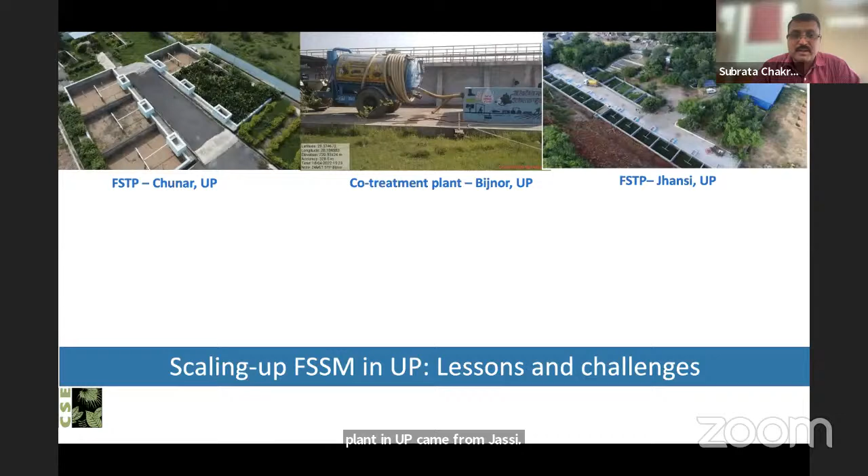Just to give a quick background of the India and Uttar Pradesh scenario: in Uttar Pradesh, 240 million people live in urban spaces, which is 22%, and there are 760 plus cities, and only 14% have piped sewer services. This means that 86% of people are dependent on on-site sanitation systems like septic tanks. So providing services to this 86% is an important and critical task to keep our rivers and water bodies clean.

This journey started before 2018, when CSE conducted shit flow diagram studies in more than 60 towns of UP, and made this an agenda at the state and national level. In 2018, the first FSTP in UP came in Jhansi, which is a 6 KLD nature-based FSTP.

Based on various other activities, in 2019 a tender for 61 more plants was floated. At that point, the target for UP was to have 62 plants - 22 co-treatment plants and 40 FSTPs. Now, as of March 2023, construction...

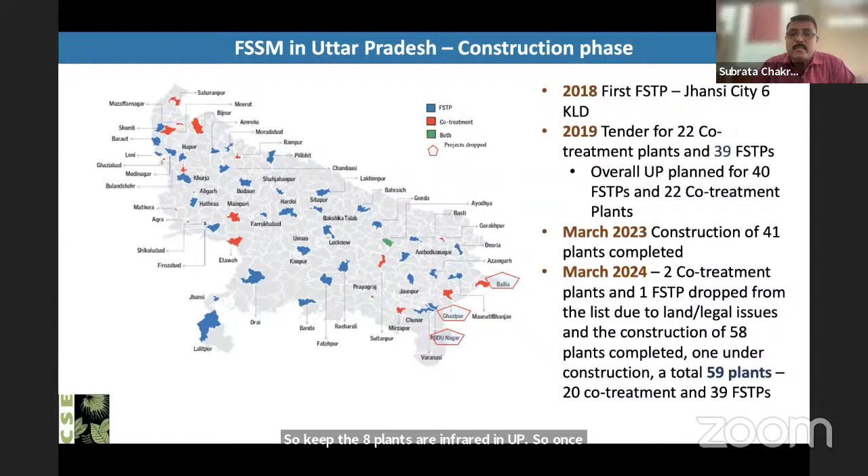So once plants are infra-ready, the next level of operational challenges comes in. During the construction phase we faced a couple of challenges in UP, and I want to quickly give you snapshots of some of them.

So clarity on operation and maintenance was not there. We spoke to the cities and various stakeholders and found that the plants were being constructed, but people involved in the entire process did not know at that point how these plants would run in the future. There was no clarity on that.

So reaching the plant site is an important issue. Having an all-weather approach road is important so that vehicles can move inside the plant. Approach road was an issue for 21 plants.

Lack of coordination among various departments and sub-department level officers was an issue, and change in implementation agencies was reported from 13 cities.

It means that in UP, Amrut was the major funder. Amrut funded UP Jal Nigam, the government agency in charge of creating infrastructure in various cities. UP Jal Nigam in turn contracted out various organizations and companies to create this infrastructure. The company that won the bid subcontracted their assignment to other organizations and companies. This created problems for smooth implementation and construction of the program, and it took time.

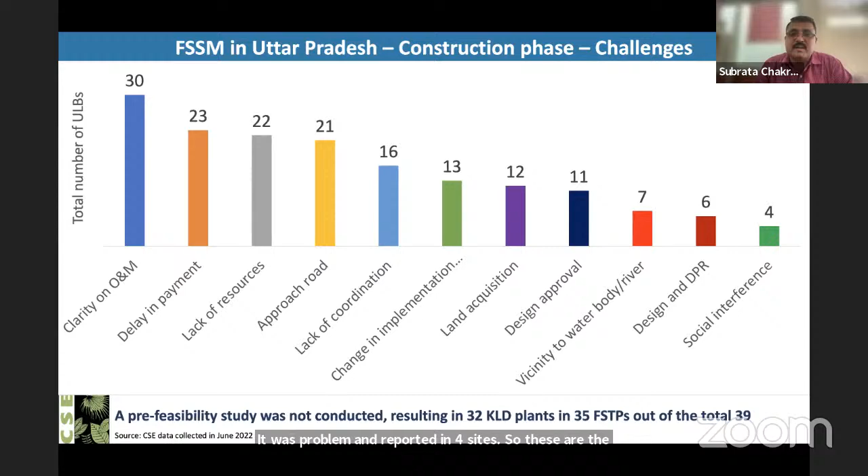So these are the problems the state witnessed during the construction phase. Now coming to the technology part, just touching on it quickly.

Out of these 59 plants, 39 are FSTPs. In UP, there is no state prescription for cities to have a certain chain of modules for FSTPs, so we see varied module chains. There are two major types of technology: nature-based technology and hybrid technologies.

Out of the 59 plants, 54 plants have been funded from Amrut with a costing of 198 crores, urban local bodies have funded 3 plants, and State Mission for Clean Ganga have funded 2 plants. So total 59 plants, and the capex cost is around 200 plus crore.

If we come to the size of the co-treatment plants, we see there are 20 KLD to 100 KLD plants, and maximum co-treatment plants are of 25 KLD. There are 11 co-treatment plants.

When it comes to the FSTPs, there are 4 plants which are of 6 KLD, 10 KLD, 12 KLD, 25 KLD, but the rest of the 35 plants are of 32 KLD size. This is because pre-feasibility studies were not conducted in many cities, many plants. So this is a kind of size that has been prescribed and taken up by the state, which may not fit the context.

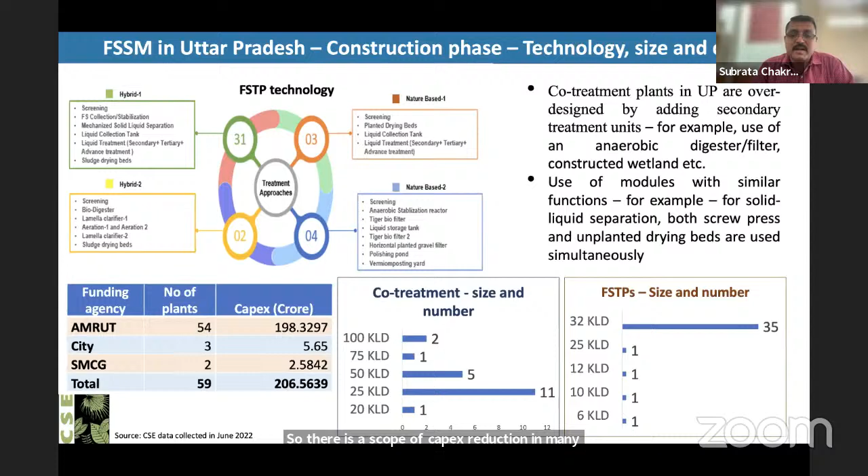With this, coming to April 2023, we see there are 40 plus plants ready for operationalization. So UP moved to the next level of problems—the nature of problems changed from construction-related problems to operational challenges. From April 2023, we have come across these problems.

Handover of the plant—we never imagined that could be a problem, because the construction was being done by UP Jal Nigam. Once construction is over, the construction agency UP Jal Nigam is supposed to hand over the plant to the owner, which is the urban local body. We thought this would be done in a smooth manner, but this did not happen so.

Once the handover is done, arrangement of the operation and maintenance mechanism at the plants needs to be done, and there is a problem there as well. Integrating private desludging operators was an important issue, and then having FSSM bylaws, capacity gap for operation and maintenance of the plants, community awareness, and low capacity utilization of the plants—these are some of the problems the state has faced, and the state has also taken certain actions that we'll be quickly sharing here.

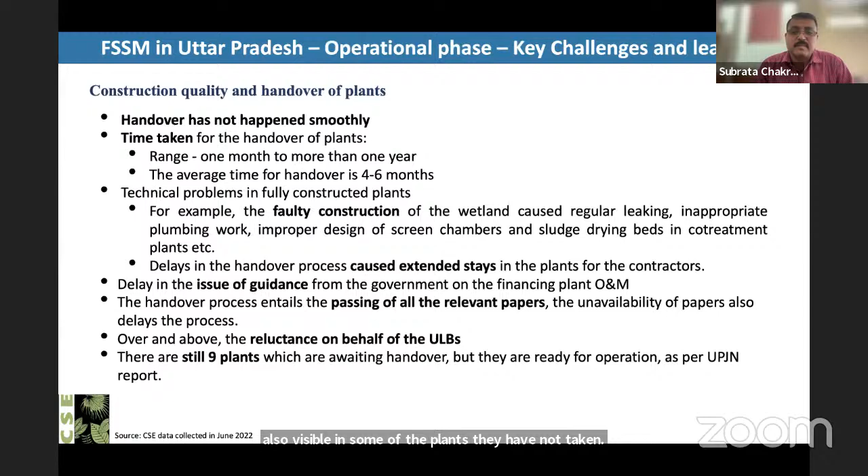Over and above that, reluctance on behalf of the ULBs is also visible in some of the plants they have not taken over, whether big cities or small cities, for some reason or other. There are 9 cities as of now which have not taken handover. So this is one of the technical problems.

If you see on the left-hand side panel, this is one fecal sludge treatment plant where the mechanism is supposed to pump out the sludge from the desludging vehicle directly. But you need to have a screen chamber and a screen before you pump out the sludge. So with our advocacy, with the Jal Nigam and others, if you see on the right-hand side, the location of the pump changed and a screen chamber was constructed.

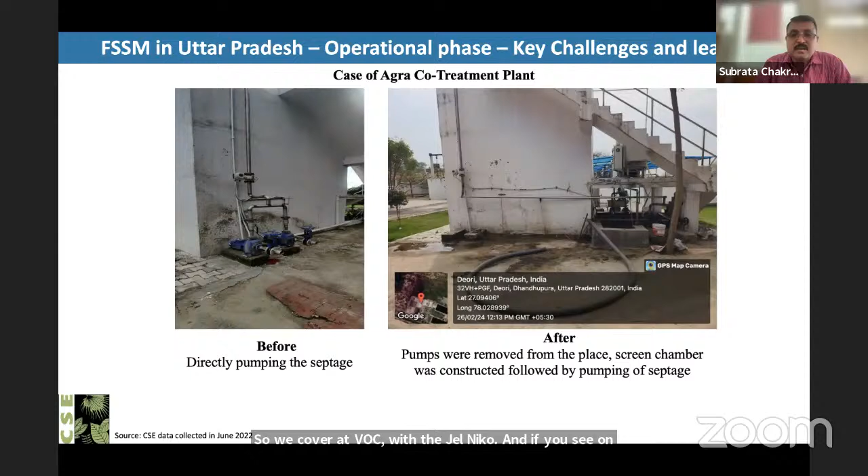Now, once the handover is done, the major important thing is the costing of the operation and maintenance of the plants. The initial contracts given by the UP Jal Nigam to the companies constructing the plant indicated that rupees 1.25 crore should be given for operationalizing the plants to the same company by the ULB. The ULB started thinking, how can I give 1.25 crore per year to a company to run a plant? They felt it was not possible for them.

Then CSE did a study in 2022 to understand the costing of FSTPs. Based on the findings, for a 32 KLD FSTP, we found three major types of technology in terms of costing: drying bed based natural system, Tiger biofilter based system, and hybrid system. We identified the cost components for operation and maintenance. The maximum cost comes to 22.32 lakhs per year, not month, and 16.8 lakh minimum cost for the natural based system, which is around 1.5 to 2 lakh per month.

This is the base cost; urban local bodies can add profit value to this when hiring any agency for O&M. Now for the co-treatment plant also, we have calculated the cost. For a 100 KLD co-treatment plant, the O&M cost comes to 20-plus lakh, and for a 25 KLD plant, it comes to 11 lakhs.

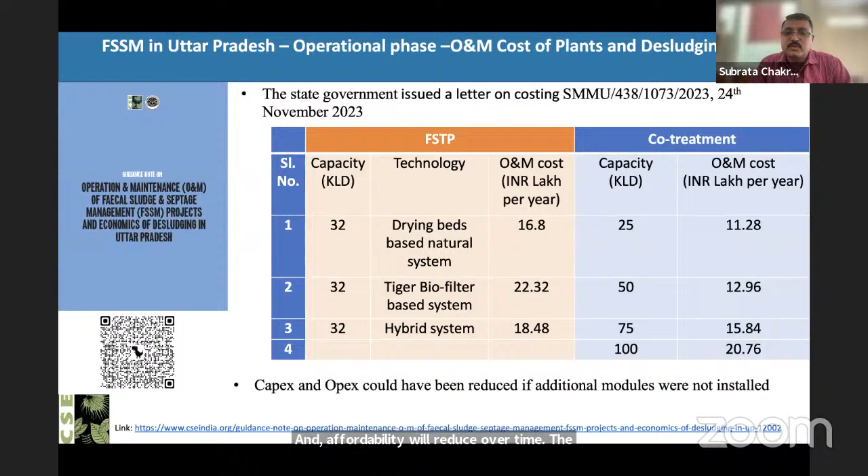Along with this order, the state has also issued a guidance note on fixing the desludging fee, because experience from various ULBs, medium and small size as well as big cities, shows that the desludging cost varies from rupees 500 to rupees 4,500. So CSE and the government started thinking about the logic and economics behind the desludging fee.

Based on that, we did a survey, and with the survey, we came up with a desludging cost calculator. In the desludging cost calculator, two important variables are the number of trips made by a vehicle per day and the distance to be traveled per trip. Based on these two criteria, the desludging cost is fixed. Once the cost is understood, we can understand the profit margin and the fee amount that can be derived.

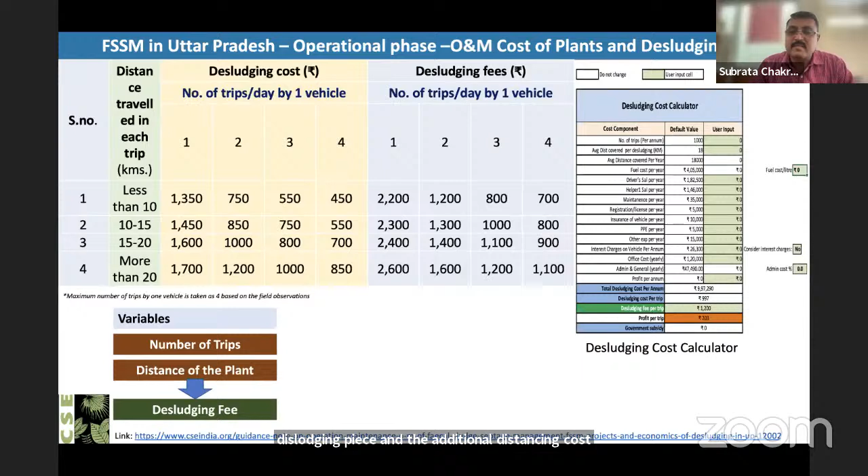So that his business will be viable as well, and the city people will keep getting desludging services. This is the reason the state government issued this guidance note on desludging cost and desludging fees. A desludging cost calculator was also given to the cities to help them arrive at context specific desludging fees.

Once all these guidelines were given, the cities started saying to us that this is a new type of contract, we need support on how to write it. Once the handover is taken, contracting was also taking another set of time - 1 month to more than 1 year is the time being taken by cities to arrange an entity for O&M of the plant.

For speedy engagement of contractors, CSE worked with the state government, and the state government issued a model contract document to the cities so that they can quickly contract.

Now the cities in UP are free to either engage a contractor, SHG women, or manage the plant through their own officials. So 3 types of things can happen in UP. It's a fully flexible model.

And the state has told the cities that either Central Finance Commission Fund, or ULB's own fund, or State Finance Commission Fund can be used for O&M of the plants.

Now, when cities gave contracts for O&M in the last 1 year, they have done it in 2 ways. In some contracts, they have only given O&M responsibility. In some plants, they have given O&M responsibility plus desludging services responsibility to the contractor.

Currently, 14 cities are managing plants themselves, 13 have contractors, and 4 cities have engaged SHGs.

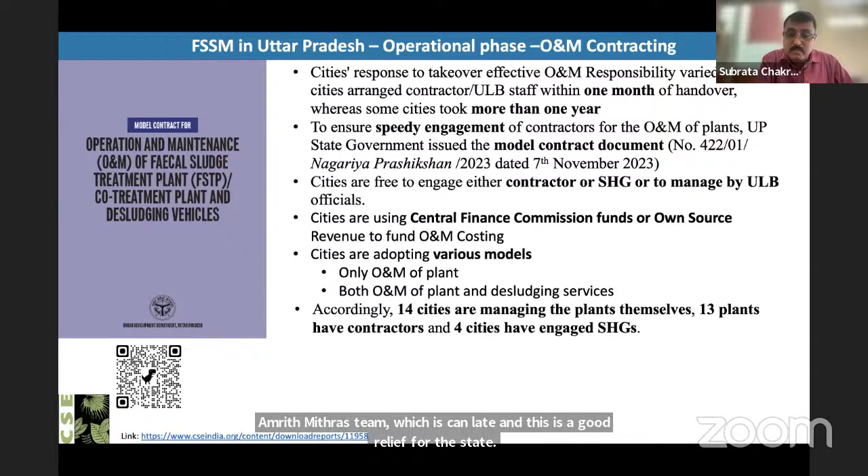Now SHGs are engaged under the Amrit Mitra scheme, which came late, and this is a good relief for the state because cities are now engaging women in the sanitation process in an important manner. We will be speaking about them in some future episodes.

Now coming to the softer part, with our experience from Chunar and Bijnor, we found that drafting of the bylaws, newspaper publication, and then taking this to the gazette notification process takes a longer time. But gazette notification of the FSSM bylaws is important because it has an important component on fees and fines. This gives the city a legal positioning.

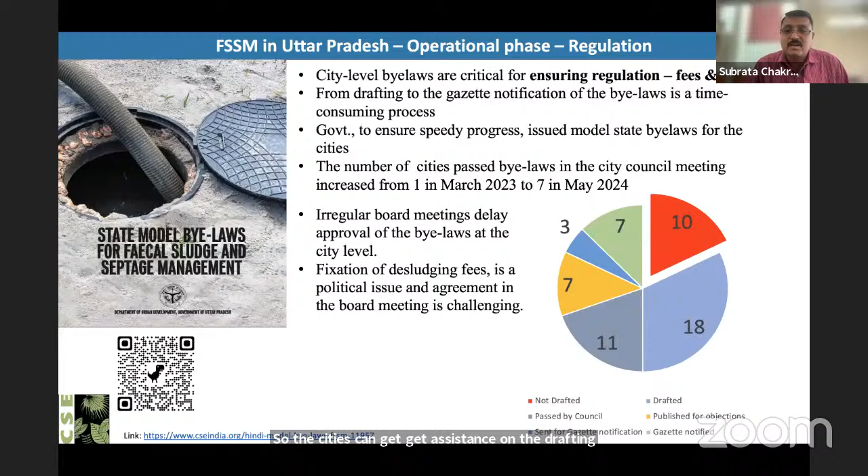To ensure speedy progress, CSE supported the department to develop one state model bylaw, so the cities can get assistance on the drafting part. This has helped the state quickly achieve a level - currently 10 cities have not drafted, and out of 56 cities, 46 cities have drafted something.

And now desludging is a challenge. Currently the UP cities have only 20% overall plant capacity utilization. For that, it's important that we register all private operators and regularize them.

Now, desludging vehicles are not a problem because under Amrut, 2 to 12 vehicles are given to all the Amrut cities. Narrow lanes are a problem in cities, and my colleague Hari will be speaking specifically on this. Distance of the plant from the city is important because it increases cost.

If the distance increases, the desludging fee cost increases. In some cities, distance is very high - 8 plants are more than 15 to 20 kilometers distance from the cities, and there's also oversized treatment plants, which we've already discussed.

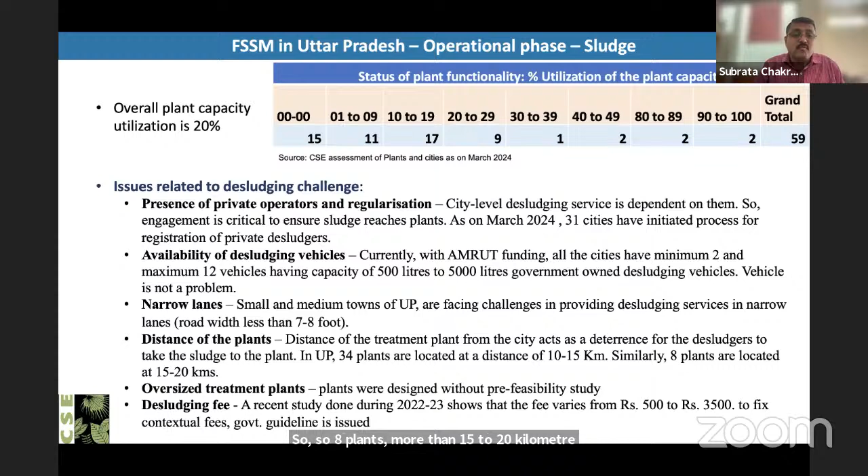Now, what is the potential of the city to achieve the plant capacity utilization? We found there is a 60% potential of plant capacity utilization. Why and how 60%?

So current plant capacity utilization is only 125 KLD. Now the question is why there is a gap—339 minus 125. This means currently desludging operators are working, but the sludge is not coming to the plant.

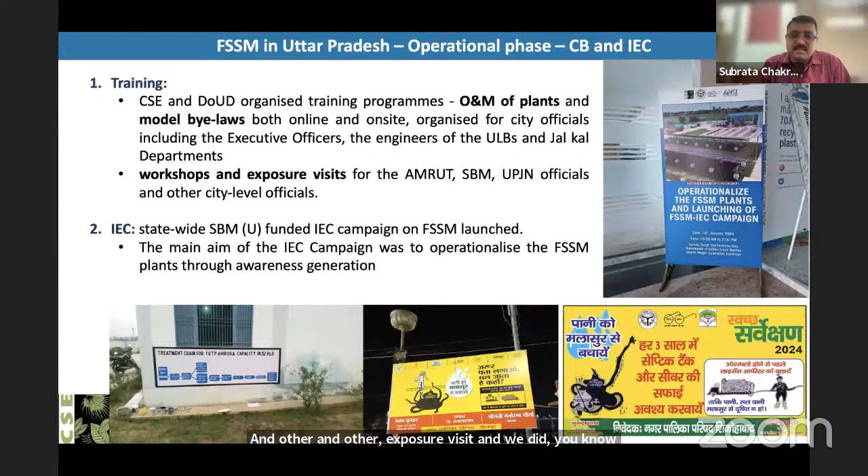So this takes us to an important area: monitoring is very important. We did training mainly on operation and maintenance of the plants, model bylaws, workshops and exposure visits, and IEC programs. This is an ongoing process, and we do more rounds of IEC programs. We also do state level monitoring. The state Urban Swachh Bharat Mission director and Amrut director—both departments—have been very active in following up with the cities to take this agenda forward.

We do ease of septage management tool implementation. We came up with a report, and it shows that 7 cities managed to secure only a 1-star rating, and the rating was given based on 3 major areas: functionality of the infrastructure, sustainability, and inclusivity.

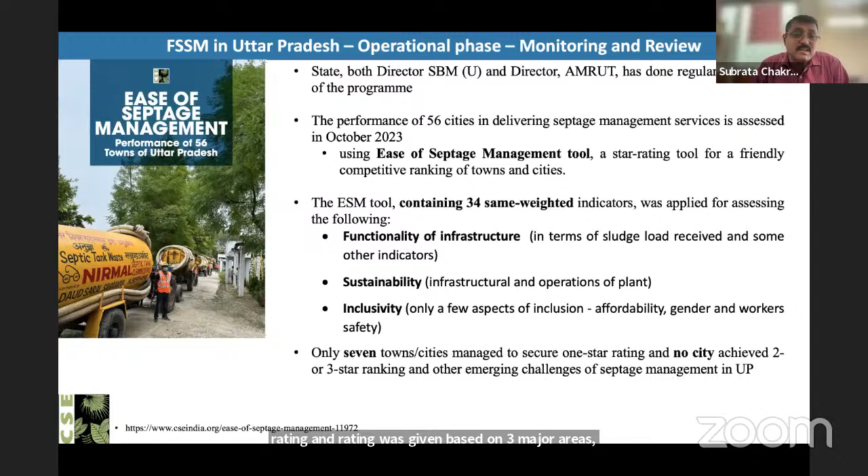So now what is the learning? One thing that's important—what we have understood—is that there is no universal technology. Treatment choice is context specific. We cannot go for indiscriminate replication of technology, not 32 KLD everywhere. We should not do over-designing.

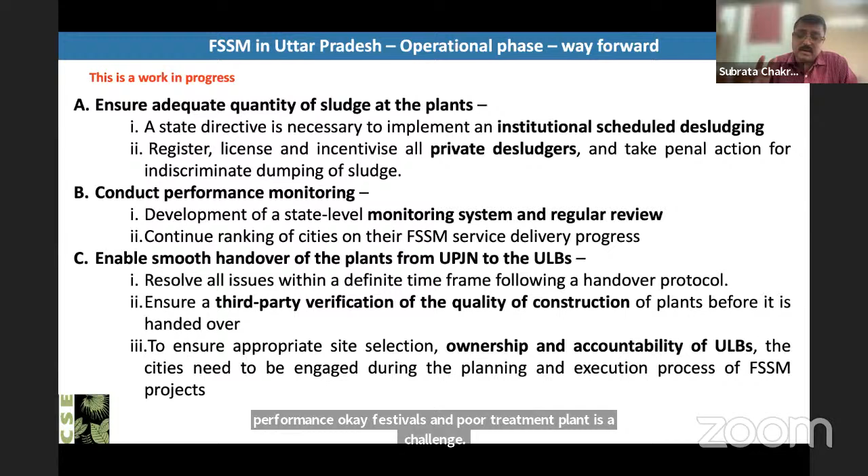This is resource intensive, and we can save resources on this, which also affects sustainability adversely. In UP, FSM is being upscaled. The pace might be questioned, but it is progressing over time. Underperformance of FSTPs and co-treatment plants is a challenge—sludge is not reaching the FSTPs in adequate quantity as we want, but that has to be kept in mind, since this is the early year of the program. Over-design leads to high capex, and desludging from a narrow lanes of cities is a challenge.

Most importantly, affordable sanitation is critical for sustainability. Since affordability is important, the UP government has issued an order on the operation and maintenance costing of the plant and costing of desludging fees, because affordability leads to sustainability. And if our sanitation system is sustainable, we will be able to save our rivers.

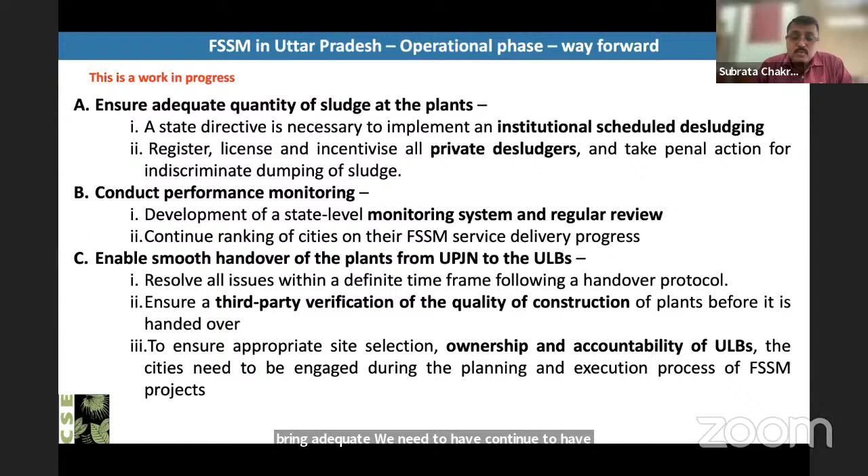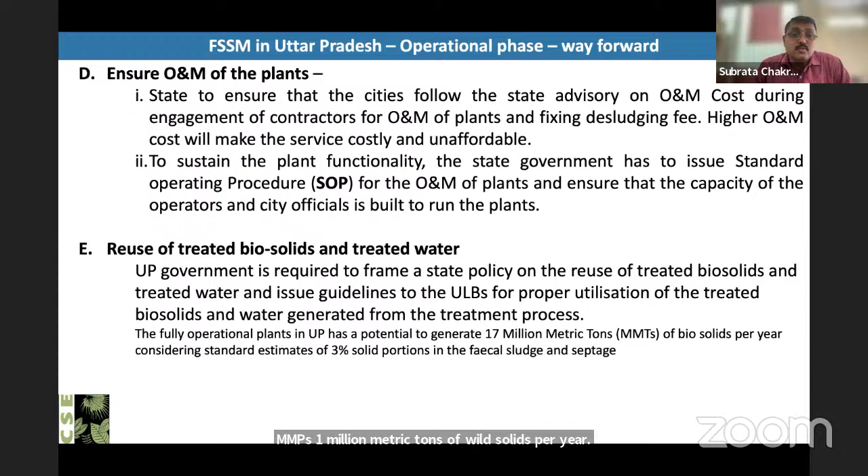These are a couple of things we need to do in the coming year in UP: we need to bring adequate quantity of sludge, continue monitoring at the state level, ensure smooth handover of plants, and focus on operation and maintenance of the plants. We need an SOP, standard operating procedure document, released as soon as possible, because many plants are coming to that stage. Reuse of treated biosolids and treated water is also coming up as a big challenge, given that UP plants have the potential of generating 17 MMT, million metric tons, of biosolids per year. We need to do something on this, because we have a standards issue in India.

So with this, I want to close this presentation, and I want to invite Hari. Thank you very much.

In India, manual scavenging is banned under the Prohibition of Employment as Manual Scavenger Act 2013, which prohibits the engagement of any individual for cleaning of septic tanks or sewer lines. The central government is also focusing on achieving that objective by completely switching towards 100% mechanized sewer cleaning.

In that line, they have also launched various missions like Safai Mitra Suraksha Challenge, Namaste Scheme, and Swachhata Udyami Yojana. All these missions and programs are aimed towards ensuring zero manual entry into sewers and zero deaths due to manual cleaning of sewers. But these are just the aims and goals of the central government.

On the other hand, if you see the data from the Ministry of Social Justice and Empowerment, it highlights that around 1,000 people died since 1993. If we look at the data of the last 5 years, around 339 people died due to manual scavenging or cleaning of sewers or septic tanks, and among that 339, the highest number of deaths were in Uttar Pradesh.

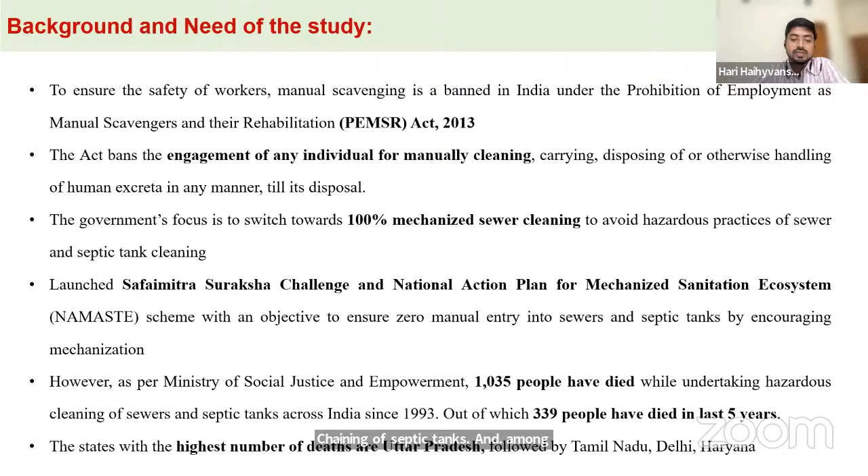So at CSE, we try to understand why this is happening, and we did a study in a few towns aimed at ensuring safe mechanical emptying of septic tanks, majorly to prevent unsafe practices of septic tank cleaning.

The study area or scope was mainly narrow lanes and unplanned settlements, because as you already know, if we talk about the technological options available for wider lanes, there are many trucks or advanced robotic mechanisms available for cleaning of septic tanks or sewers.

But when we talk about narrow lanes, particularly less than say 7 feet or 5 feet, those are the households facing more challenges in terms of cleaning of septic tanks and accessibility of vehicles. So in this study, we looked at the current desludging practice in households residing in unplanned settlements, and also the capacity of ULBs in providing desludging services in these areas.

We looked at a few case studies, initiatives, and innovations happening across India, and we identified the current gaps and recommended a way forward.

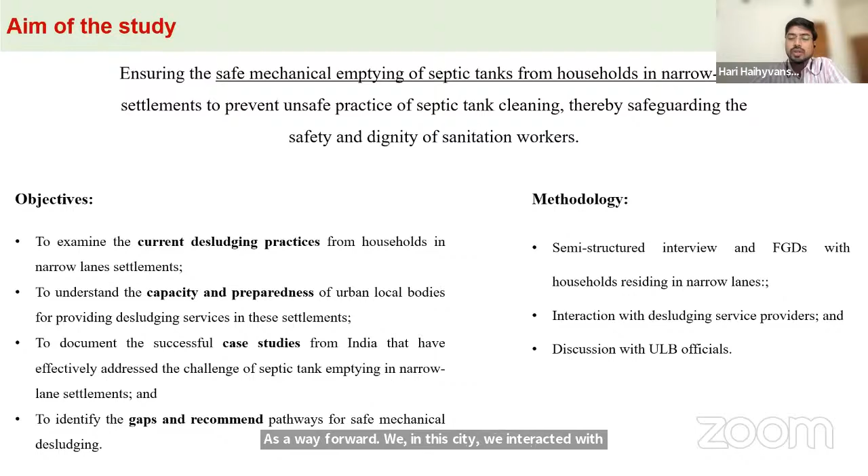In this study, we interacted with households, desludging providers, and ULB officials to understand what is happening on the ground. A state level consultation workshop was done under the chairmanship of the Director SBM to highlight the challenge and understand their views on whether it is actually a challenge as per their perception or not.

Going forward with the study, these are the 4 towns we studied: Jhansi and Shahjahanpur, which are 2 municipal corporations, and then Amroha and Farrukhabad, which are 2 municipal councils. From the pictures, you can see these are very narrow lanes, width ranging from 7 to 5 feet, and not even a straight line - it's a very unplanned kind of settlement.

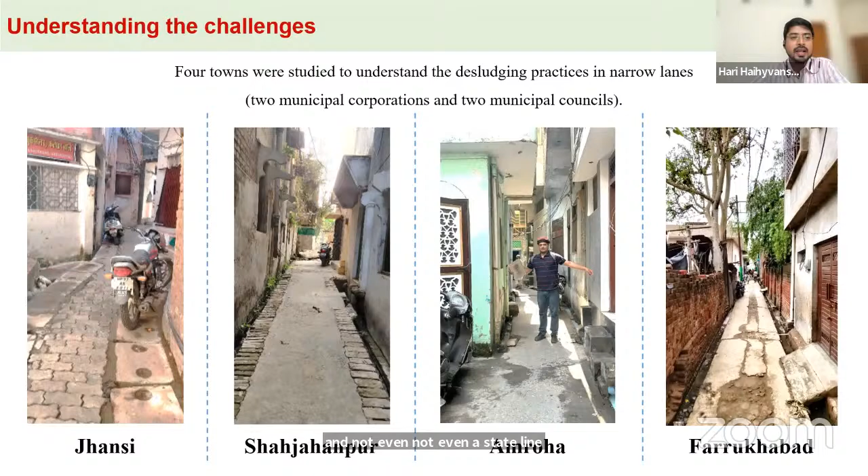Instead of going city-wise, we summarize the challenges these cities are facing. One common challenge is the low frequency of desludging - emptying is happening after 15, 20, or even 30 years in some cases. This is mainly because septic tanks are not built as per standards, and many times these are unlined septic tanks. Also, these 4 ULBs already have desludging vehicles, including small vehicles.

But even the smallest vehicle has a width of 6 feet, so it can navigate in a road width of up to 8 to 9 feet, and they further have a pipe of 100 to 150 feet for desludging of septic tanks. So, for example, if a household resides in a lane less than 7 feet wide and beyond 150 feet of pipe, it becomes inaccessible for the existing desludging vehicles.

When we discussed with the ULB officials, the percentage of households living in these kinds of settlements, depending upon the class of town, ranged from 20% to 35%. So unfortunately and unofficially, this kind of unsafe cleaning of septic tanks is still being practiced in small and medium towns of Uttar Pradesh.

If we look at the core issue, why is it inaccessibility? Accessibility is the issue, and it somewhere links to inadequate urban planning, which results in unplanned dense settlements, because of which there are no options for the household other than opting for unsafe cleaning of septic tanks.

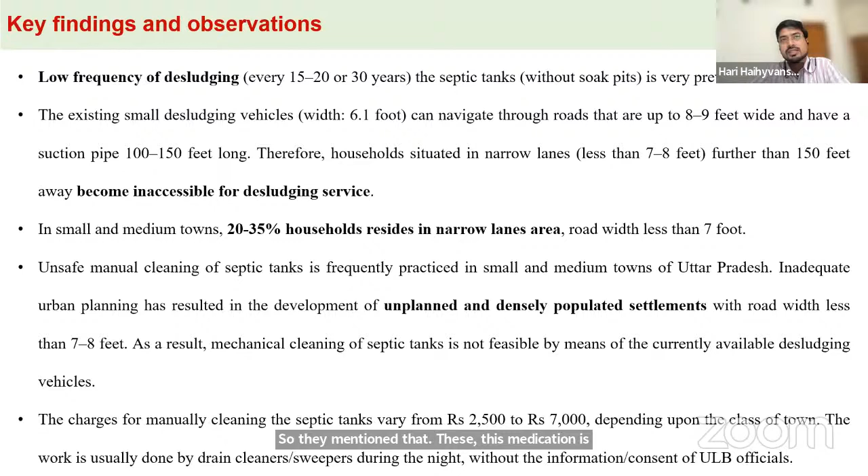The charges for manual cleaning range from 2,500 to 7,000, depending upon the class of town. When we discussed with the sweepers or drain cleaners who usually do this job, they mentioned that this manual cleaning is usually done during the night time, so that there are no objections from neighbors due to foul smells. So these were the challenges from the household side, on the ground.

When we look at the capacity of ULBs in terms of providing desludging services to households, all Amrut towns have at least three desludging vehicles. Bigger towns have 5 to 10 desludging vehicles depending on the population range. The capacity of vehicles ranges from 0.5 KL to 4 KL.

Interestingly, the smallest vehicle, around 500 liter capacity, is being procured in large cities and million plus cities. But on the ground, we found the demand for these smallest vehicles was actually higher in small and medium towns, because the percentage of households residing in narrow lane settlements is higher there.

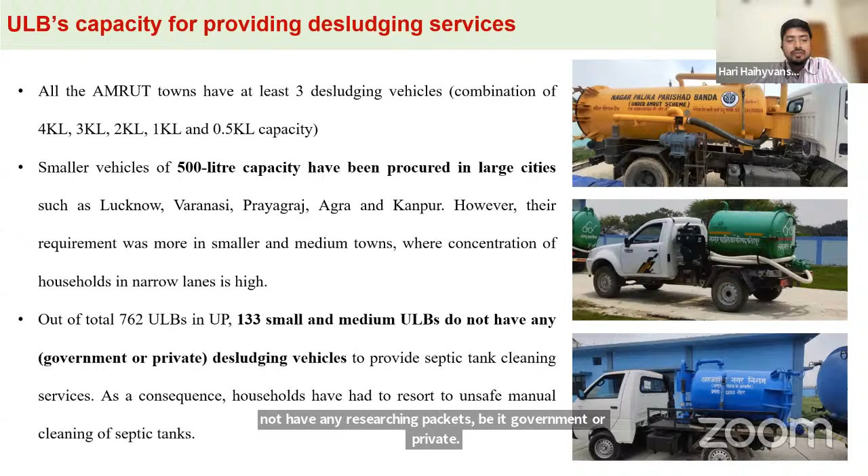When we look at state level data, in UP around 762 ULBs exist, out of which around 133 ULBs do not have any desludging vehicles, be it government or private. So unfortunately, households have had to resort to the unsafe practice of cleaning septic tanks themselves.

Also, when you talk about non-AMRUT cities, around 530 small and medium towns have 600 desludging vehicles, out of which only 49 vehicles are private, being operated by private operators.

This data highlights important insights: the concentration and number of desludging operators is very low in small and medium towns, which also shows that desludging is primarily a public service. ULBs or local governments cannot just rely on private desludging operators for providing emptying services.

Another challenge faced by ULBs is that there are many technological innovations happening across India in terms of desludging vehicles, but those innovative options are still not available on the GEM portal, due to which ULBs face challenges when they look for procurement of the vehicle.

So these are the demand and supply side gaps we saw. Now we'll look at what initiatives or innovations are happening across India.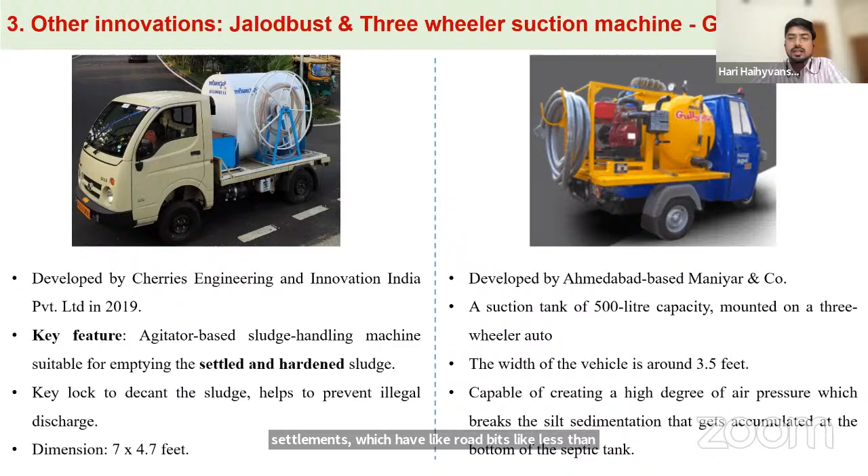Another option is the gully van three-wheeler suction machine. It's a three-wheeler auto-type suction machine with a capacity of 500 liters. It can easily navigate in slum settlements which have road widths less than or around 5 feet. So these are the innovations which can be used for unplanned or narrow lane settlements.

To conclude the discussion, we found that irregular and low desludging of septic tanks is the main problem in most ULBs, and focus needs to continue to mitigate that challenge. Another point is that desludging of septic tanks is a public service. ULBs need to focus on regular emptying of septic tanks and cannot just rely on private operators.

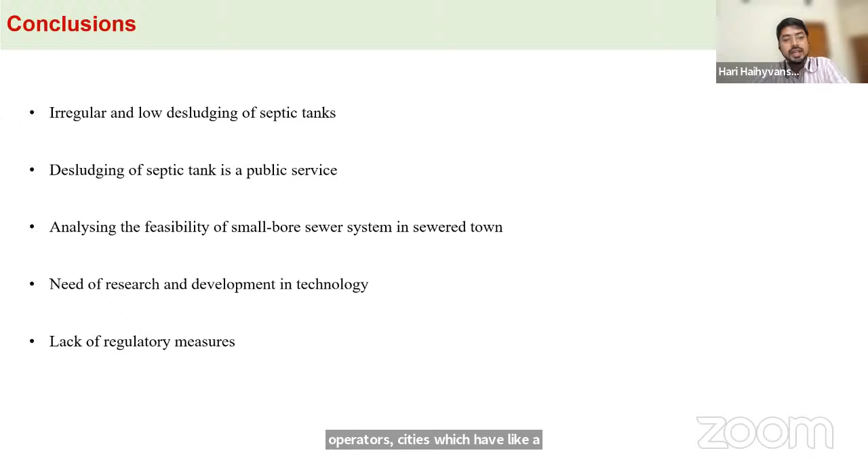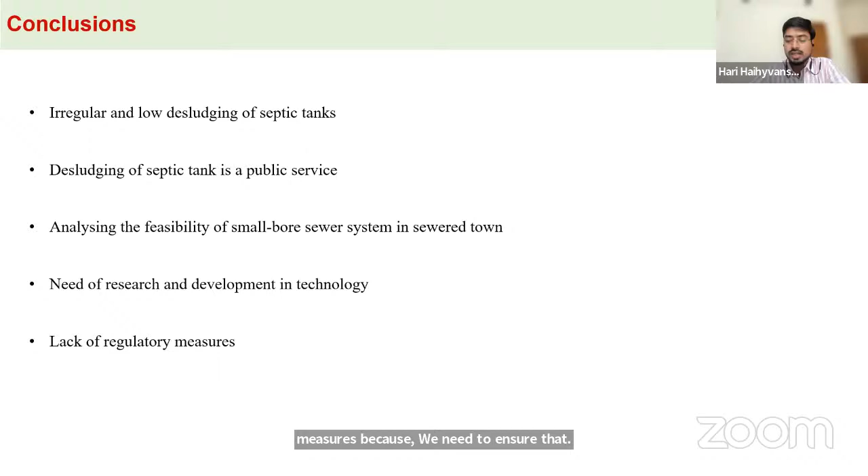Cities which have partial sewer networks should also explore the feasibility of small bore sewer systems or simplified sewer systems. These are not yet tried or much researched in the Indian context. Another issue is the lack of regulatory measures, because we need to ensure zero manual entry into septic tanks.

As a long-term recommendation, the current practice of procurement of desludging vehicles is bulk purchase without any backing of logical data. So we propose a ULB level plan followed by a state level plan for the procurement of desludging vehicles. This plan needs to be backed by factors like the town layout, the current and actual desludging potential, and what the fees should be.

When we go for smaller desludging vehicles, we need to also look at the affordability or financing of the desludging fees, because when we decrease the size of the desludging vehicle, the trips will be more. So we need to look at the financing part also.

As a short-term goal, we suggest all class 4 towns should make a provision of at least two sizes of desludging vehicles, one big and one smaller, and also a double booster pump with an additional set of 200 feet of pipe, so that without much burden, it's a very low cost option, and the desludging reach can be maximized.

The last one is the profiling of sanitation workers, which I mentioned in the case of Jhansi. It's a very interesting and cost-efficient option, and also provides dignity and employment opportunity to sanitation workers. This needs to be prioritized at the ULB level for ensuring safety of sanitation workers and safe mechanical emptying of septic tanks and sewers.